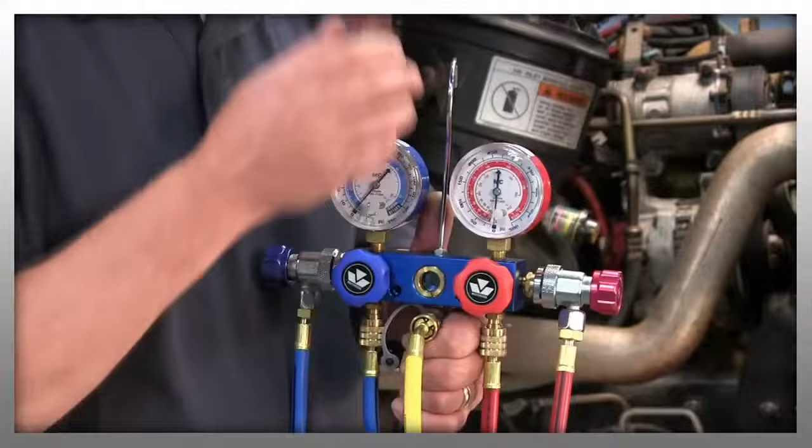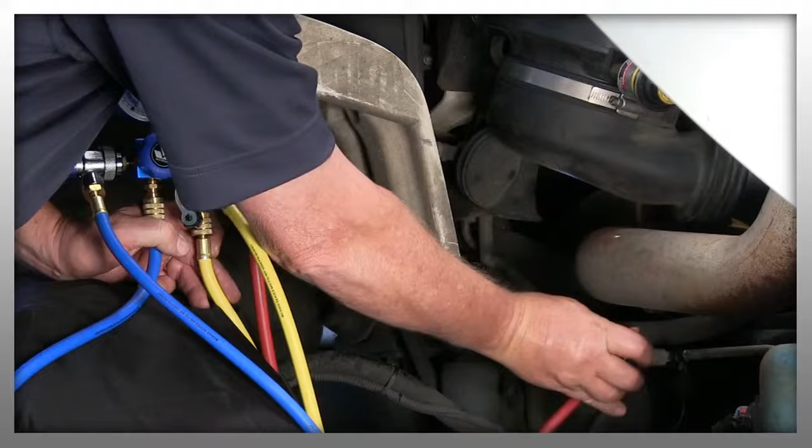To start our air conditioning troubleshooting, we need to know what's happening inside of our system. Our manifold gauge set is the best tool we have for checking the pressures in our system and to see what it's producing. To get started, let's hook up our gauge set. We hook them up with the engine off.

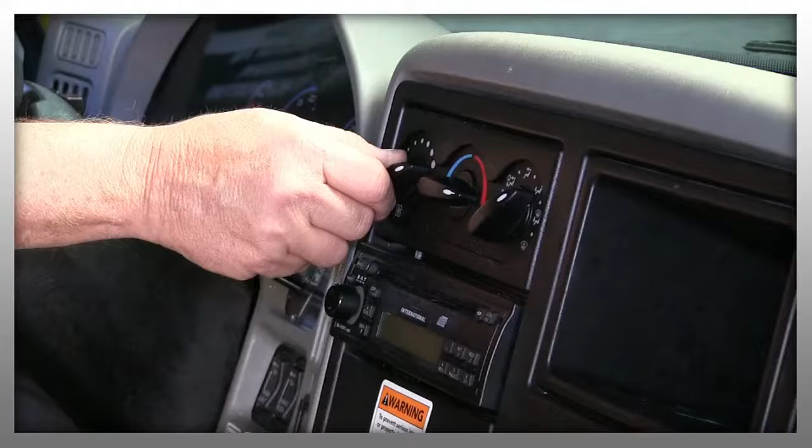We start the engine, run it at a fast idle, turn the thermostatic switch to maximum cold, and the blower fan to maximum speed. If the refrigerant pressures are correct and the AC system is functioning correctly, you will see gauge readings from 18 to 38 pounds per square inch on the low side, and 150 to 320 pounds per square inch on the high side.

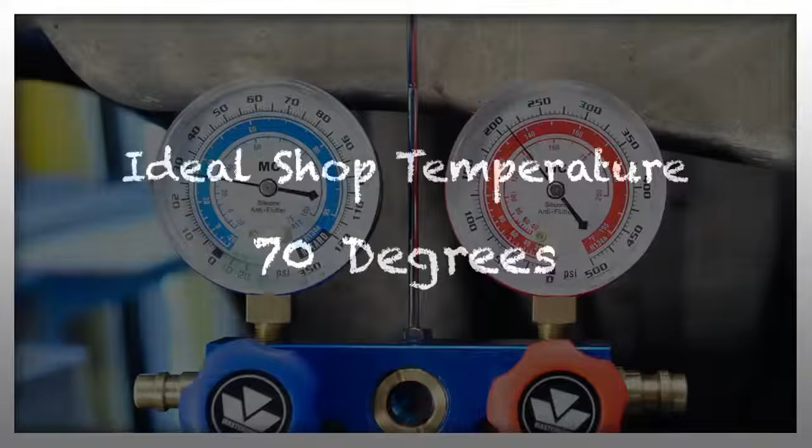You might ask, why such a spread between the pressures on each side? This spread is due to the potential variables in the ambient air temperature. In other words, how hot or how cold is your shop? The ideal shop temperature is 70 degrees. If your system is working correctly, you will see a more narrow range of gauge readings like 29 pounds per square inch on the low side and 215 pounds per square inch on the high side.

If you see a large difference between the low side and high side pressures, as in the example that I just mentioned, that's 186 pounds per square inch between the low and high side. You can then presume that the compressor is working well. Any compressor that can give you a nice spread between the low and the high side is functioning properly.

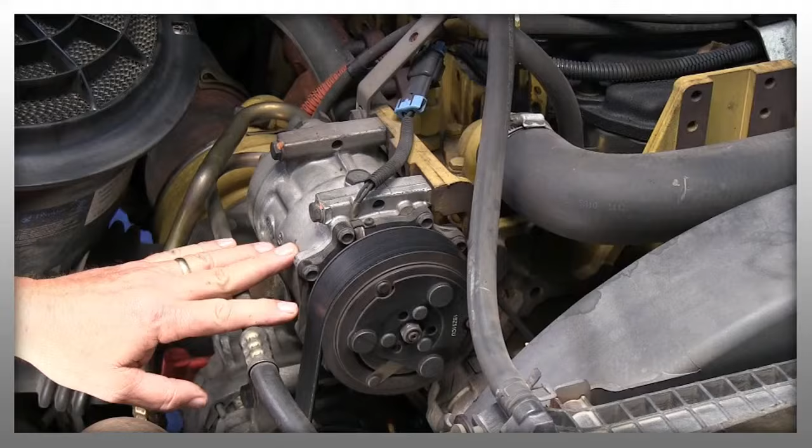Being careful not to come into contact with any of the engine moving parts, you can also use your hands to do a quick check of the system temperatures. The low side, which is the larger hose or pipe, will be sweating and cold, and the high side, which is the smaller hose or pipe, will be hot to the touch. Now that we know what the normal readings are, let's explore what causes incorrect readings.

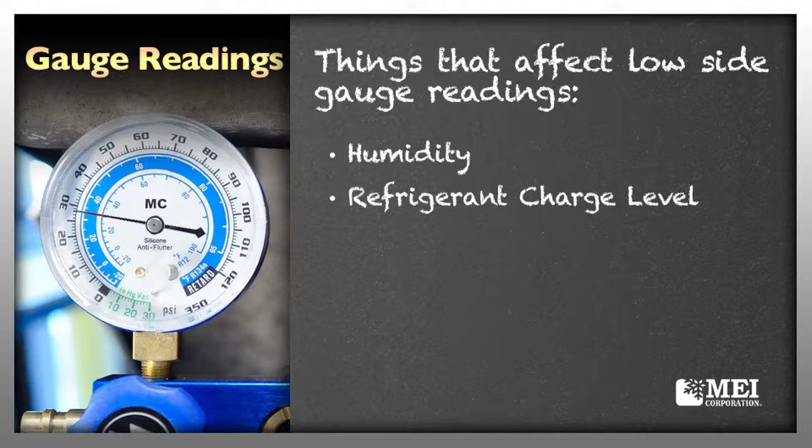Things that'll affect the low side gauge readings are higher humidity, which lowers the efficiency of the system, and the refrigerant charge level; if it's undercharged or overcharged, we'll get outside the normal range readings on our gauges. An old expansion valve, which may not be opening completely, or a plugged screen on an orifice tube will give us lower than normal gauge readings.

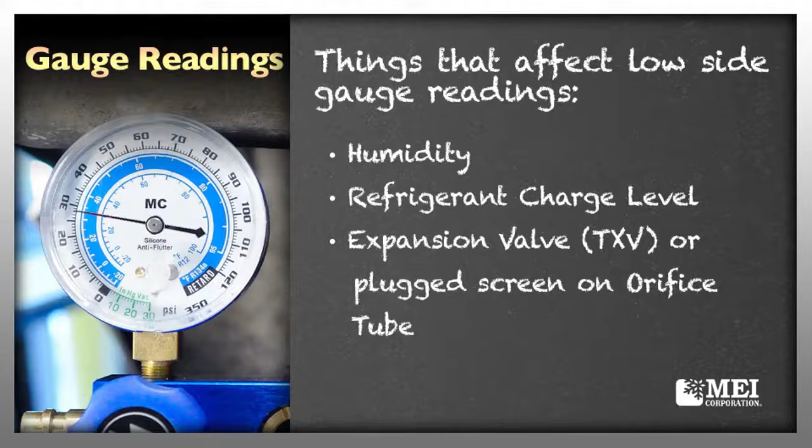Things that affect the high side gauge readings are, again, the refrigerant charge for the same reasons we just mentioned. Anything that restricts the flow of air through the fins of the condenser on the outside, or the flow of the refrigerant inside the tubes of the condenser, will also give us higher than normal readings.

If our high and low side pressure readings are correct, but we notice that the clutch is cycling on and off, an often overlooked part of the AC system is the thermostatic switch. That's the lever or knob in the dash which can be set to the temperature level desired by the driver. If this has malfunctioned, the compressor clutch will cycle on and off rapidly or not come on at all.

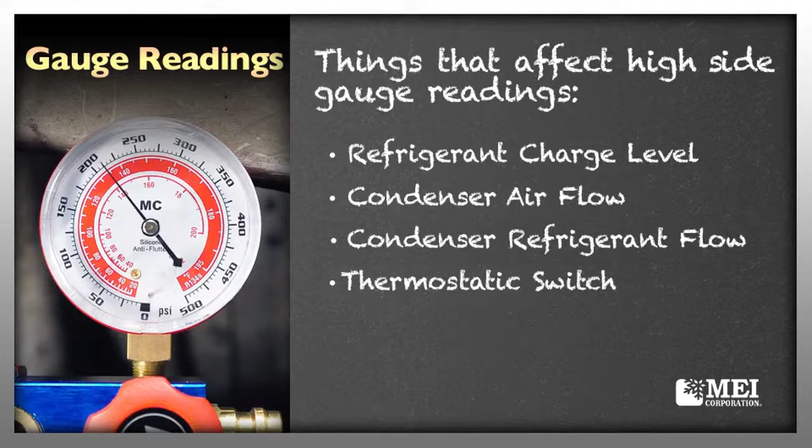Let's look at problems that can cause refrigerant overcharges on our gauge set. You may be asking, how is refrigerant overcharge possible? This can be caused by a couple different methods. For an example, Bubba, the owner-operator, knows he has a small air conditioning leak. Instead of getting the leak fixed, he stops once a week to top off his refrigerant or installs some himself.

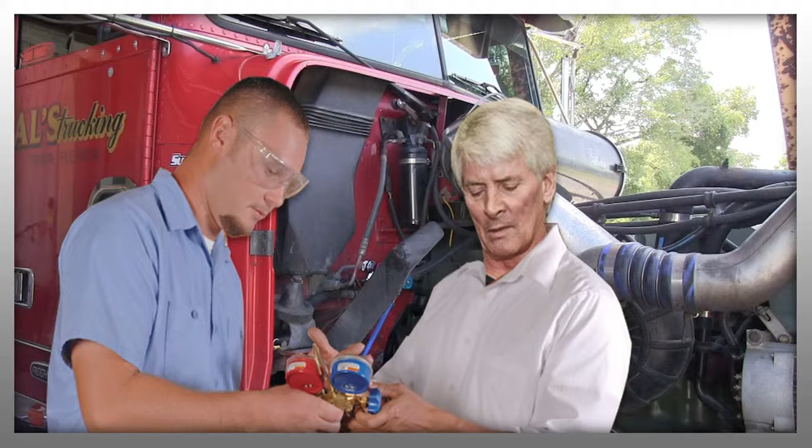Another reason is the shop who does air conditioning repairs kind of on the side and does not own a recovery machine or a scale, or does not know the correct amount of refrigerant the system requires; they guess as to how much to install. This will result in a refrigerant overcharge. Overcharge gauge readings can be in the neighborhood of 43 pounds per square inch on the low side and 320 pounds per square inch on the high side.

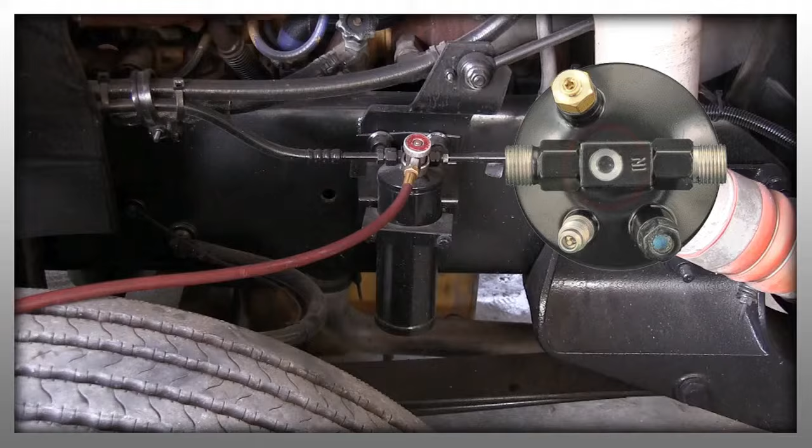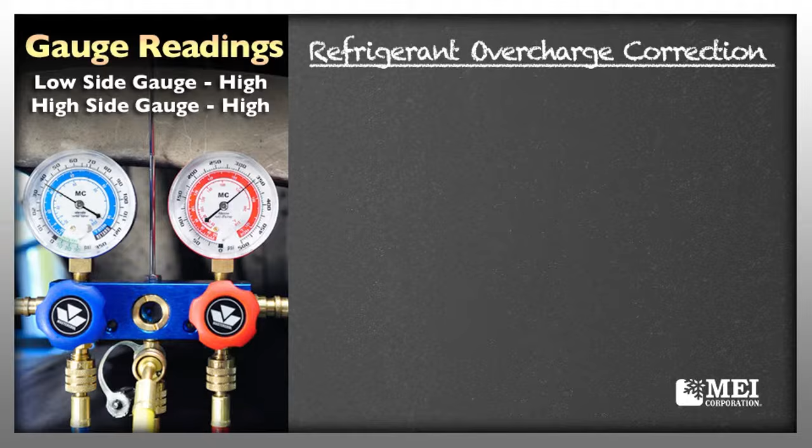Some other signs to look for on the system: the discharge air from the vents on the dash will be coming out warm. You will not see any bubbles in the sight glass on the dryer, if equipped. To correct a refrigerant overcharge, remember the most likely reason it is overcharged is because there's a leak and somebody's been continually putting air conditioning refrigerant in there to solve the leak. Leak test the system.

You can do this with an electronic leak detector, ultraviolet light, or the soapy bubbles. All these will work fine. Recover and recycle all the refrigerant. By the way, this is a good time to replace your filter dryer. Evacuate the system, in other words, vacuum it down for 60 to 90 minutes. Charge it to the proper levels. Then check the system for correct performance.

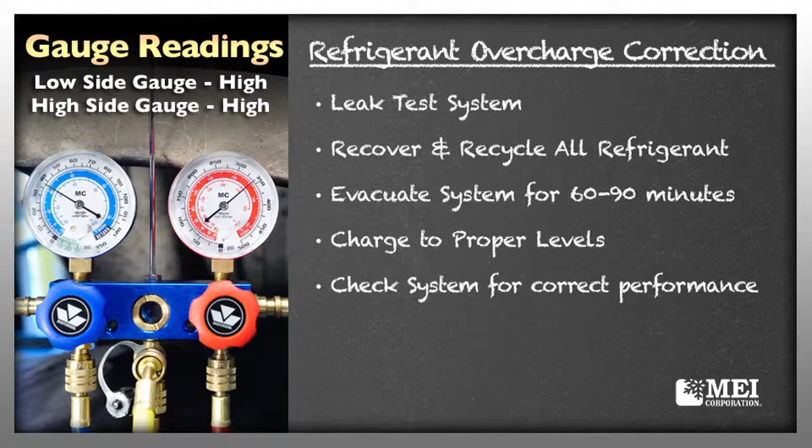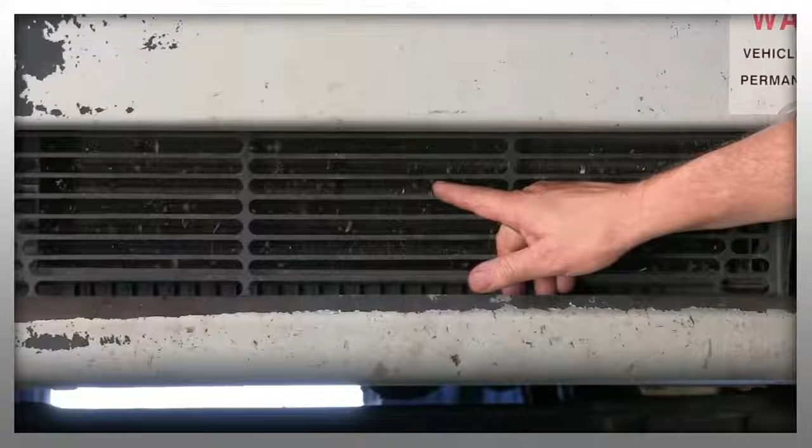Please note, there are other circumstances which can cause higher than normal gauge readings, which we'll cover in the next few minutes. Another cause of higher than normal gauge readings would be airflow restricted at the condenser. A condenser which has the cooling fins that are plugged up with dirt, love bugs, or where the fins have been damaged will not allow the correct airflow to remove the heat needed to condense the refrigerant from a vapor to a liquid. Improper fan clutch operation will also cause higher than normal gauge readings.

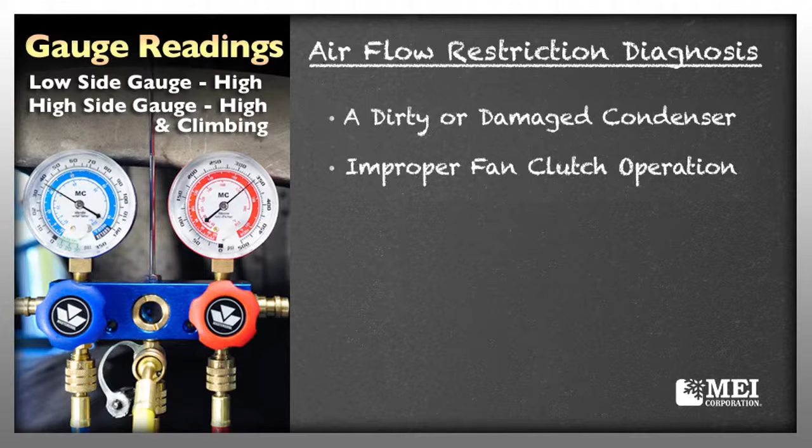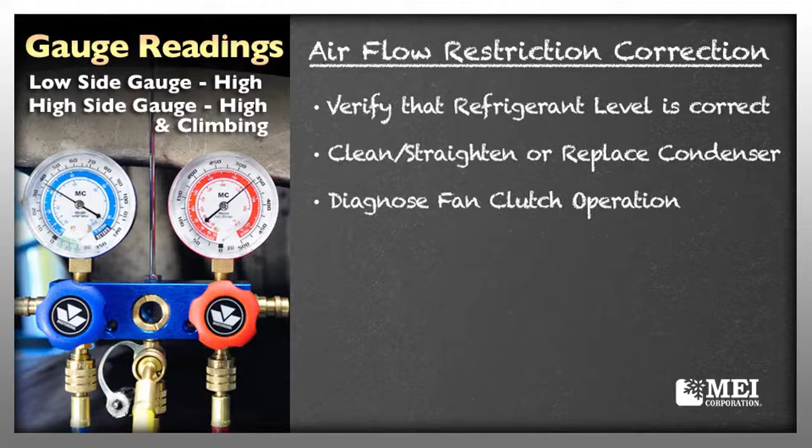A malfunctioning cooling fan switch or the fan controller will cause higher than normal gauge readings also. To correct these conditions, first we need to verify that the refrigerant level is correct. This usually means recovering and recycling the system to the factory settings. Clean and straighten the fins or replace the condenser. Diagnose the fan clutch operation to make sure it is functioning correctly. If equipped, check the electronic condenser fan for its operation. Test fan electrical circuits and switches, then you can confirm the system's performance.

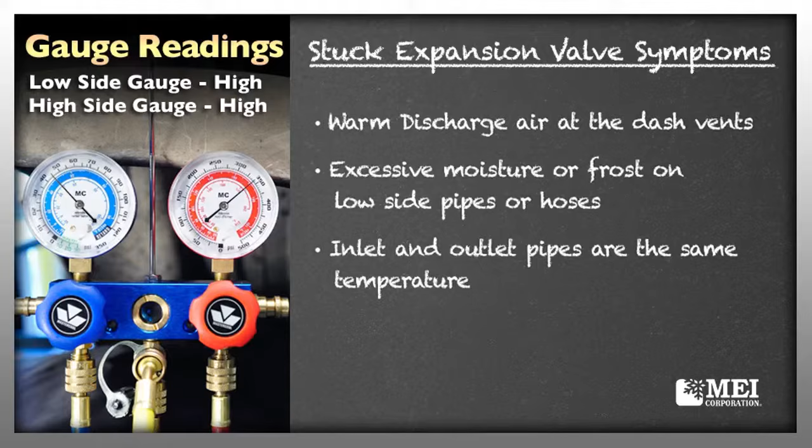A third cause of higher than normal gauge readings can be an expansion valve which is stuck in the wide open position. Symptoms for this would include warm discharge air from the dash vents, excessive moisture or frost on the low side pipes or hoses. The inlet and outlet pipes are the same temperature. If any of these exist, we have a situation where the expansion valve is stuck open. To correct it, we need to check the heat sensing tube for proper installation. The capillary tube must have the sensing bulb secured to the outgoing line of the evaporator with cork insulating tape.

If using a block type valve, the valve may be stuck in the open position due to a broken valve spring or leak in the diaphragm. This valve will need to be replaced. As with any time you have the system open, replace the receiver dryer. If you have an orifice tube system, this tube will need to be replaced. Next, evacuate the system for 60 to 90 minutes. Charge the system to the proper level.

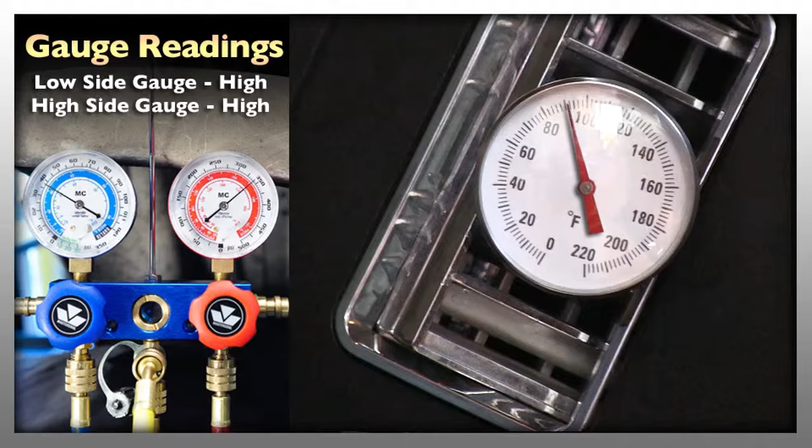Check the system's performance. A fourth cause for higher than normal gauge readings would be air in the system. This is mainly caused by not running a complete vacuum of the system before installing the refrigerant. Again, the symptoms would include discharge air at the vents will be running warm, excessive bubbles in the sight glass in the dryer, the low side pipe or hoses will be warm to the touch.

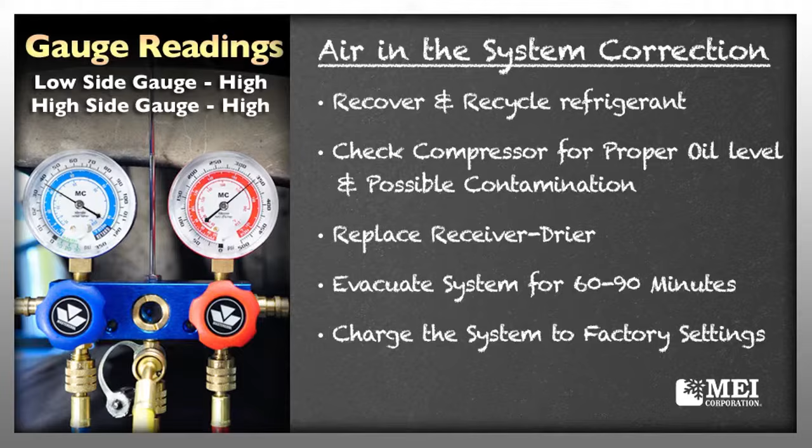To correct this problem, recover and recycle the refrigerant from the system. Check the compressor for proper oil level and possible oil contamination. Replace the receiver dryer. Evacuate, which means vacuum out the system for 60 to 90 minutes. Charge the system to the factory settings. Check the system for proper performance.

Sometimes moisture can appear in the system, and it will appear as a normal or below normal low side reading and a normal or higher than normal high side reading. The low side may temporarily drop into a vacuum, then jump back to normal. This is due to the moisture moving through the system and freezing at the orifice opening in the expansion valve, then melting and allowing refrigerant to move freely.

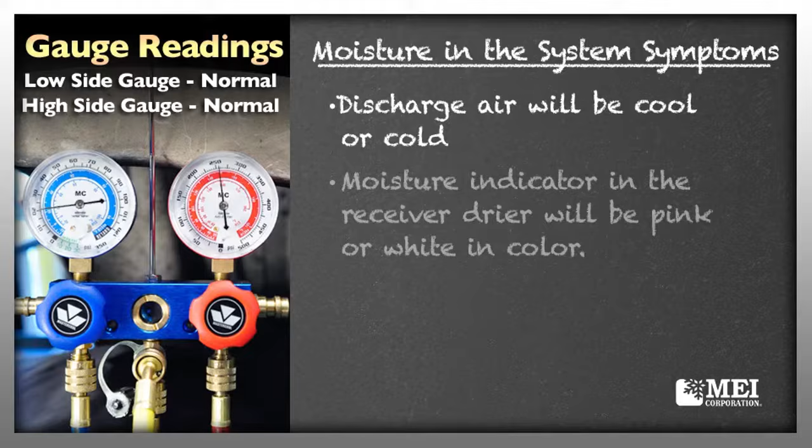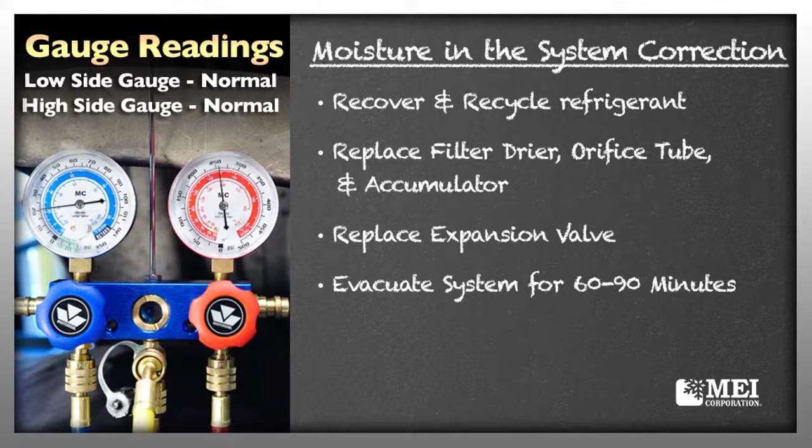When we look for symptoms, we'll see again that the discharge air this time will be cool or cold. The moisture indicator in the receiver drier will be pink or white in color. To correct this moisture in the system problem, we have to recover and recycle refrigerant, replace the filter drier, or if you have an orifice tube, replace it and the accumulator, replace the expansion valve, evacuate the system for 60 to 90 minutes, then check your system for correct performance.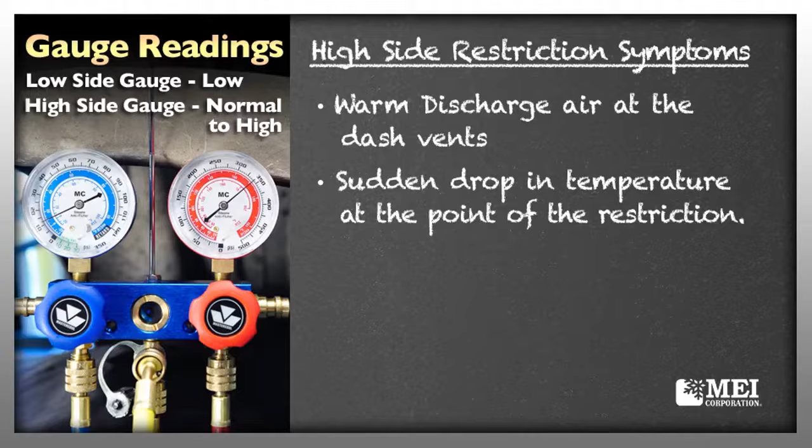A high side restriction can be caused by damaged rubber hose. The inner liner can be bruised or torn, or the full flow style condenser can be restricted by debris from a failing compressor. Our symptoms would be warm discharge air at the dash vents, or a sudden drop in temperature at the point of the restriction. In other words, you could take a temp gun and find a cold spot in the condenser at the point

of the restriction. To correct this high side restriction problem, recover and recycle the refrigerant, repair or replace the restricted component, replace the filter drier, and if it has an orifice tube, replace that. Evacuate the system for 60 to 90 minutes, charge the system to the factory levels, and then check the system for proper performance.

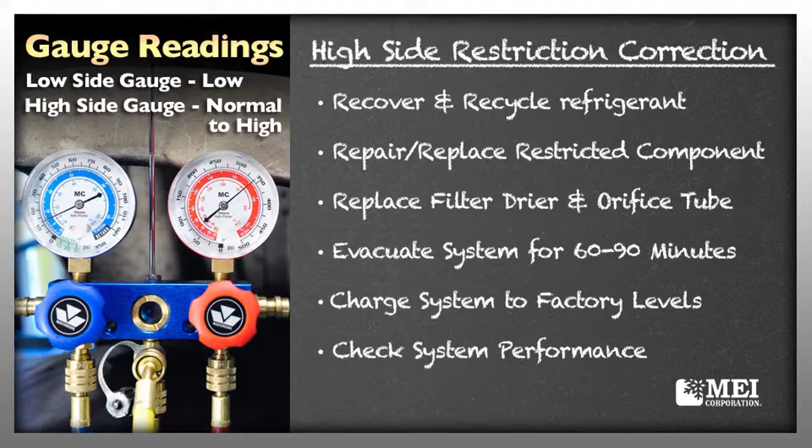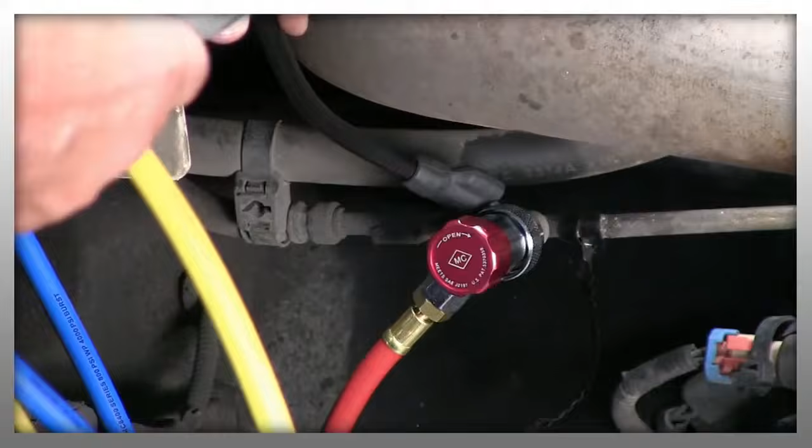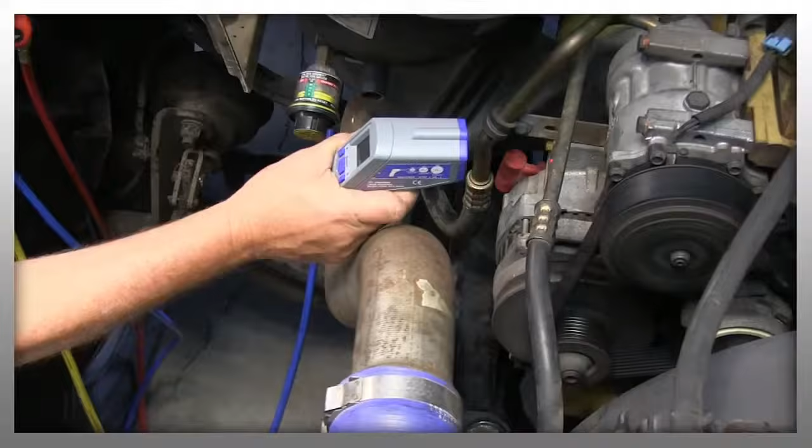A low refrigerant charge is the #1 cause of failure in an air conditioning system. Your gauges will read at or below 11 pounds per square inch on the low side and 121 pounds per square inch or below on the high side. Again, your hoses need to be checked. Every fitting needs to be checked. The compressor clutch seal needs to be checked. Look for points of moisture or oil contamination. And again, when we check the system, we can use an electronic leak detector, we can use soapy bubbles, or we can use the ultraviolet.

Once we've found our problem, we need to correct the leak, recover and recycle the refrigerant. We need to replace the drier. If it has an orifice tube and accumulator, replace those. Evacuate the system for 60 to 90 minutes. Hold that vacuum for 10 minutes to make sure the gauge remains in the vacuum setting. If it doesn't, you still have another leak and need to correct that. Then charge the system to the factory levels. Leak test the system one more time, then do a performance test on the system.

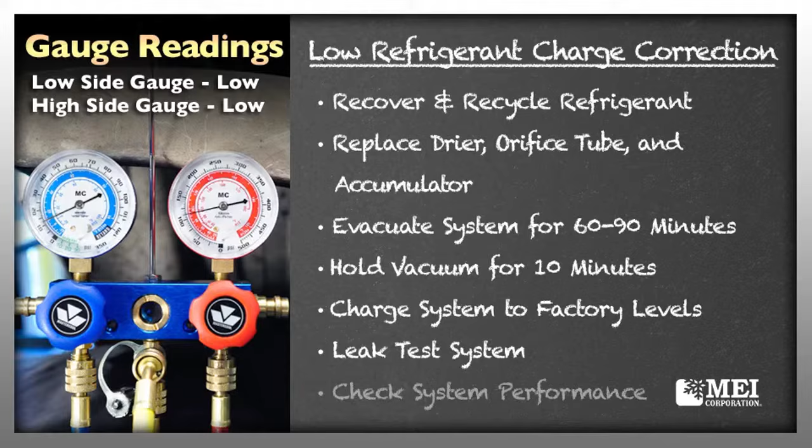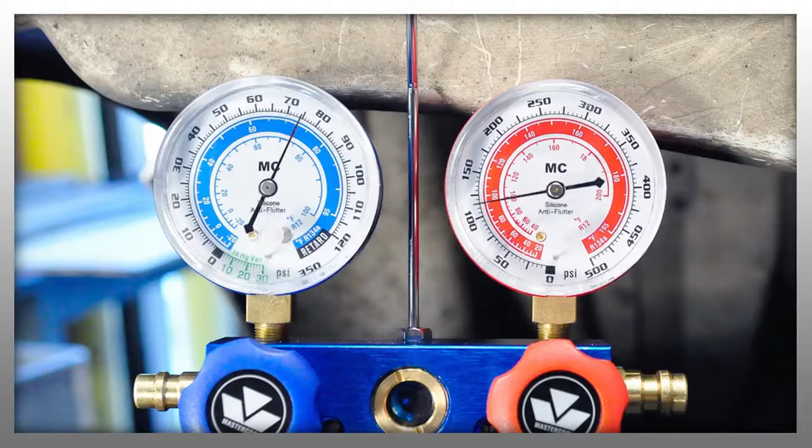If you'll notice, in all the previous diagnostics that we've done, we've always had a pretty strong gap between the low and the high side pressures. On the last one, where we had a low refrigerant charge, we still had 11 psi or less on the low side and 121 on the high side. When we have a malfunctioning compressor, it'll be evident because you'll see readings that are high on the low side and low on the high side. In fact, they may be the same pounds per square inch readings. What that's telling us is the compressor is not working at all inside, or we have damaged reed valves.

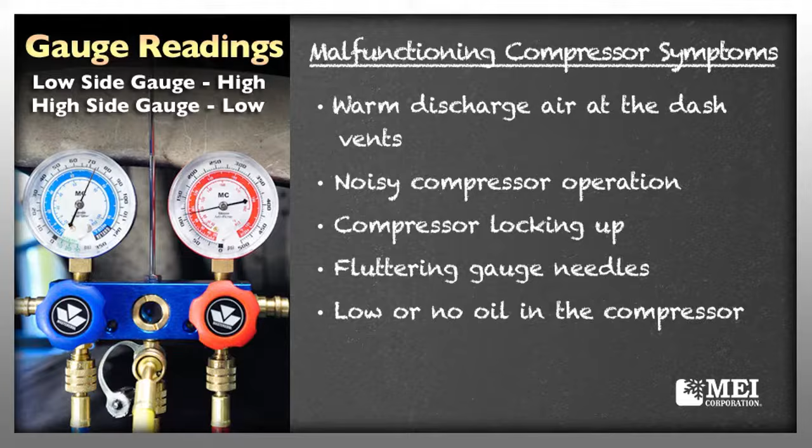Some of the symptoms we'll be looking for, again, the air coming out of the dash vents will be warm. The compressor will be noisy in operation. Some of the evidence of a compressor locking up will manifest as discoloration of the clutch facings due to its slipping. Fluttering gauge needles can be caused by one or more cracked or broken reed valves in the compressor. Low or no oil in the compressor, remembering that we need to have 10 ounces in the rotary style and 14 ounces in the upright style. These are the factory fill levels.

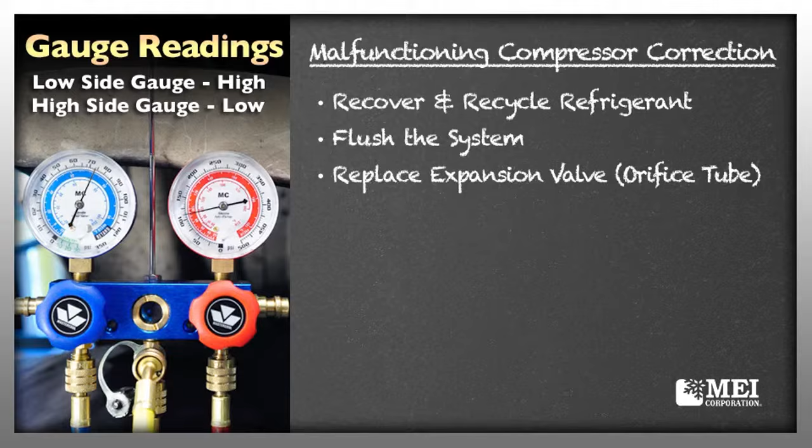To correct a malfunctioning compressor, recover and recycle the refrigerant, flush the system. Note that a full flow, the manifold style condenser cannot be flushed, and this must be replaced if the compressor has locked up. Next, replace the expansion valve, or if it has an orifice tube, replace that. Replace the receiver dryer, or if it has an accumulator, replace that. Replace the compressor. Evacuate the system for 60 to 90 minutes. If the system has been flushed, replace the correct amount of oils for the components that you have flushed. Recharge the system to the factory settings, then check your system for proper performance.

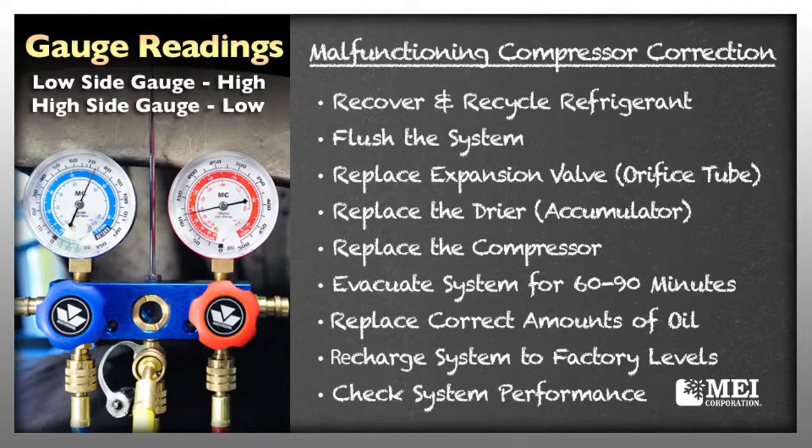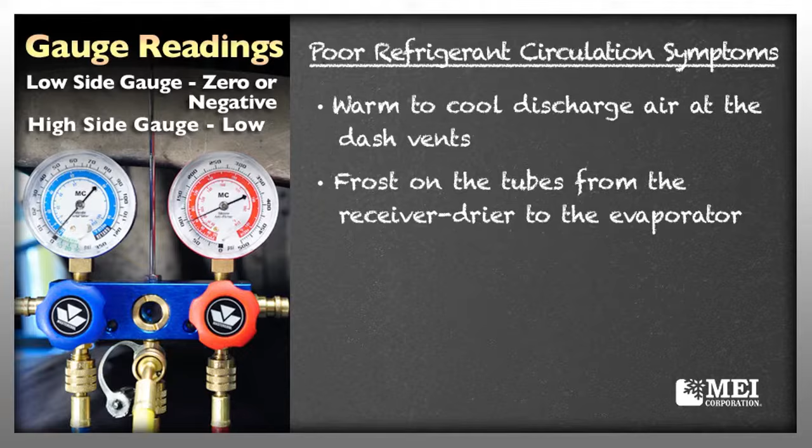Poor refrigerant circulation. This can be caused by partial or complete restrictions at the dryer, expansion valve, orifice tube, or the evaporator. This can happen if a poorly designed dryer has been used, a dryer which does not have the multi-layer design with a large spring holding the disc firmly into place. Symptoms of this problem may include warm to cool discharge air coming from the dash vents, frost on the tubes from the receiver-drier to the evaporator, or frost on the expansion valve.

Some of the things we can do to correct this are, first of all, recover and recycle the refrigerant. Flush the system. Remember to replace the oil in the components that you flushed and that you cannot flush through the full flow style condenser. Replace the receiver dryer or the accumulator and orifice tube if so equipped. Evacuate the system for 60 to 90 minutes. Charge the system to the factory settings, and then check the system for correct performance.